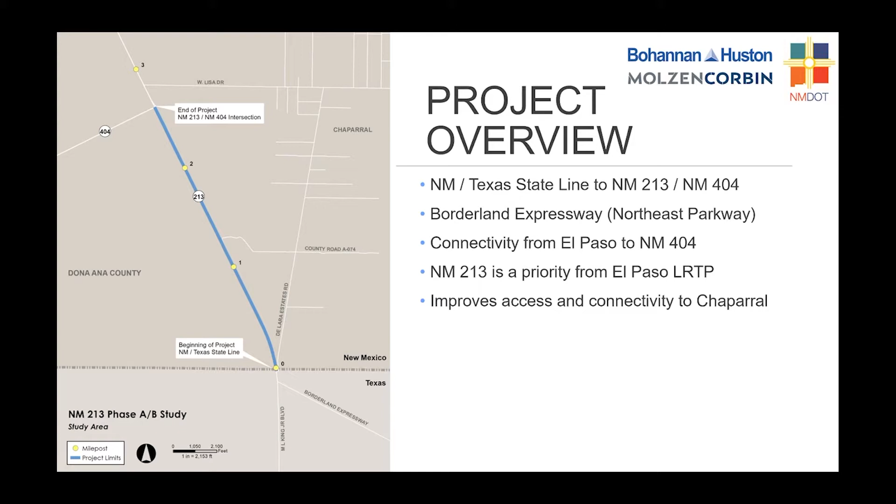And now to talk about the existing conditions analysis is your project manager for the New Mexico 213 project, Roy Gibson.

As part of the study process for the project, we have reviewed existing conditions of the current roadway. The existing conditions consist of a 2-lane rural highway, with two 12-foot driving lanes, and paved shoulders that vary in width from 6 foot to 8 foot.

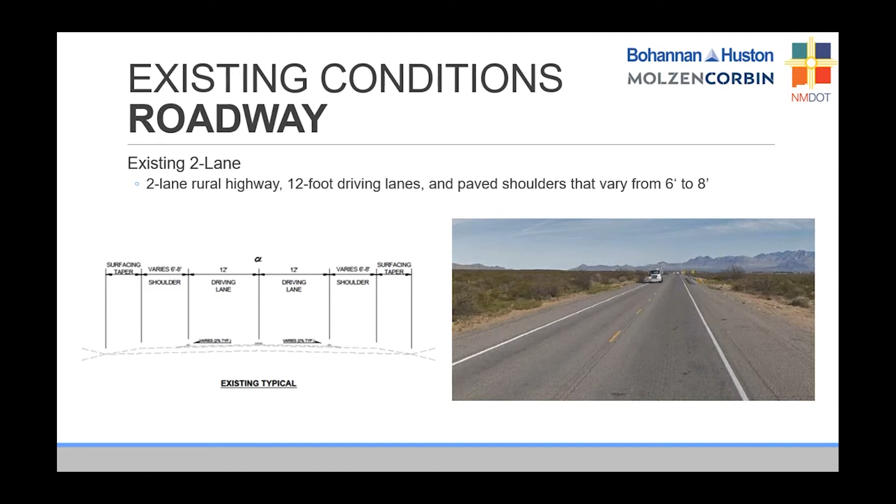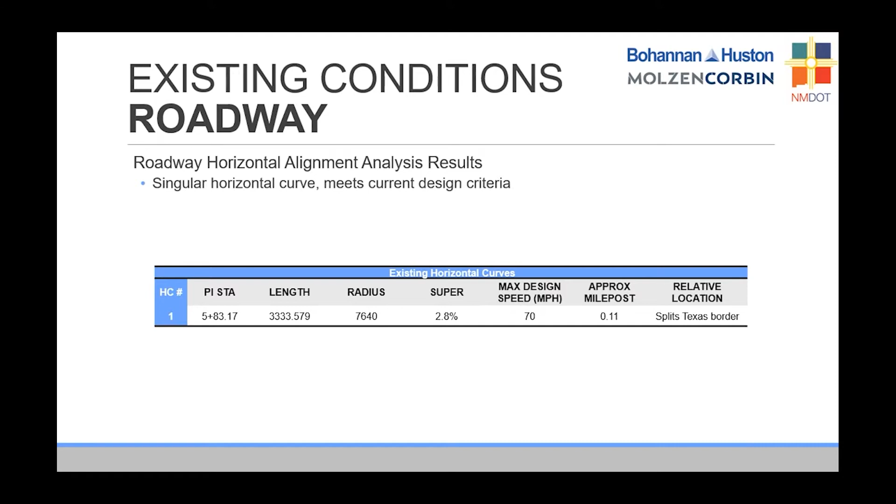The roadway contains one singular horizontal curve at approximate milepost 0.11, right at the New Mexico-Texas border. This curve meets the current design criteria.

Within the study area, 11 vertical curves exist. Two of them, vertical curve number 6 at approximate milepost 0.94 and vertical curve number 9 at milepost 1.57, fail passing sight distance at posted speed. All vertical curves meet the current design criteria for stopping sight distance.

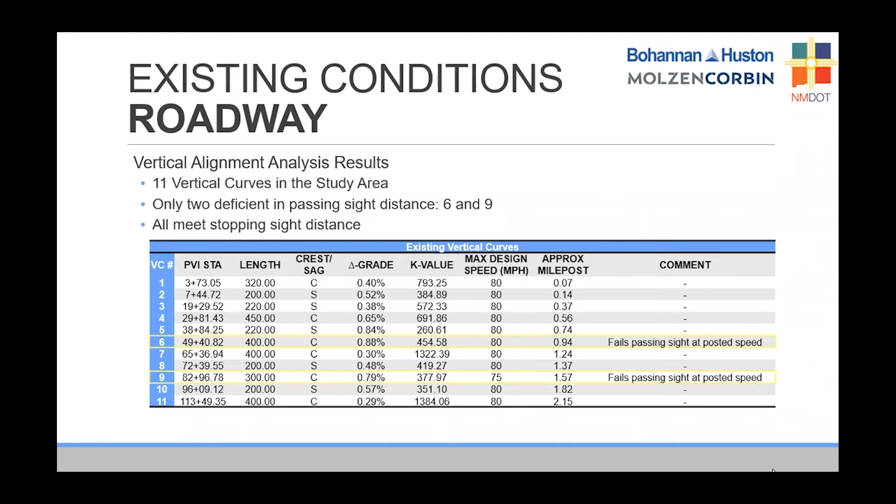This highway is classified as a rural primary arterial road. Based on the criteria in the State Access Management Manual, a road with this classification should have a half-mile spacing between full access intersections and no less than 775 feet between driveways, which equates to about 6 or 7 driveways or access points per mile.

As you can see from this map, there is a total of 16 access points located in the first 1.25 miles north of the Texas state line. This does not meet the state's current criteria for access management, and this close spacing of driveways could lead to operational problems and possibly safety issues. This is something that will be investigated closely by our team as we consider improvements for this corridor.

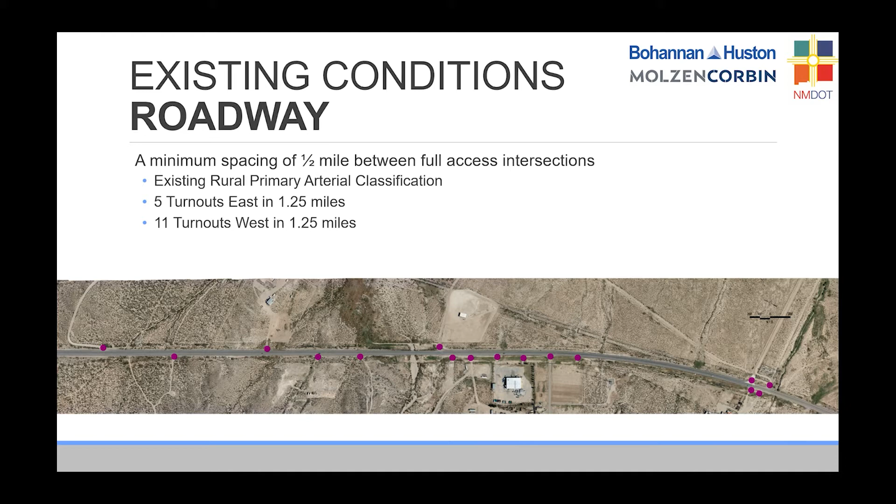As part of our existing conditions analysis, we also took a look at the traffic operations, or the capacity analysis associated with the existing two-lane highway.

Today, this roadway carries more than 7,900 vehicles in a single day. During the peak periods of any single day, that could be as much as 869 vehicles. That volume represents a level of service B, which means that the existing two-lane roadway has adequate capacity.

We also took a look at the 20-year traffic projections. We did this by applying historical growth rates, meaning how much the traffic grew over the last 5 to 10 years, and applying those growth rates moving forward. With those growth rates applied to 7,900 vehicles, this corridor could carry as much as 9,300 vehicles in a single day by the year 2040.

That's almost 1,000 vehicles in the peak hour. Even with 1,000 vehicles in the peak hour period, this roadway will still operate at an acceptable level of service C. However, as I mentioned previously, the one thing not yet taken into consideration is the Borderland Expressway improvements and the amount of traffic that may be generated from that corridor that will then reach New Mexico 213.

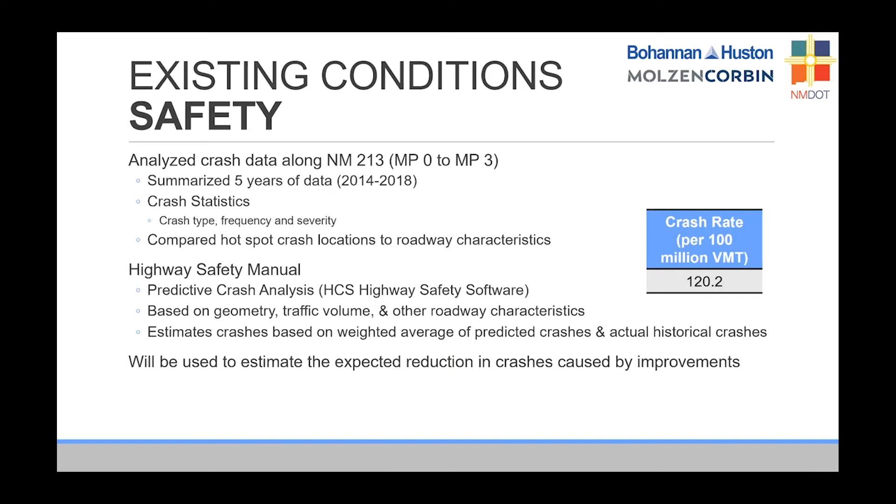The severity on this road, even though there's not a lot of fatalities or injuries, is still higher than the statewide average or the county average for this type of facility.

The highest was angle crashes, meaning 2 cars traveling in different directions hitting each other. The next was fixed object, usually caused by someone either going off the road and hitting something on the side of the road, or losing control and hitting something outside of the roadway prism. The next highest is rear end collisions, and the one at the bottom, sideswipe collisions.

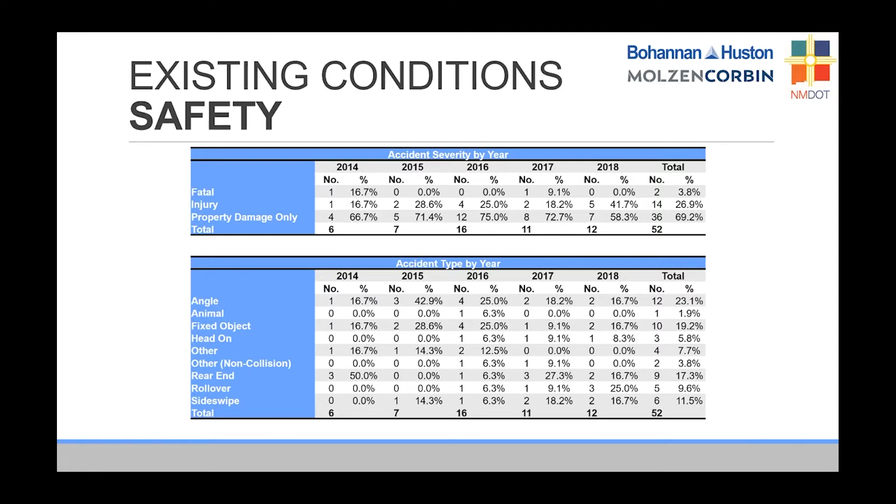It's interesting because a lot of those crashes in our crash history occurred prior to that intersection becoming a roundabout. When this was a T intersection, the number of crashes was a lot higher. Once the roundabout was installed, the number of crashes reduced significantly.

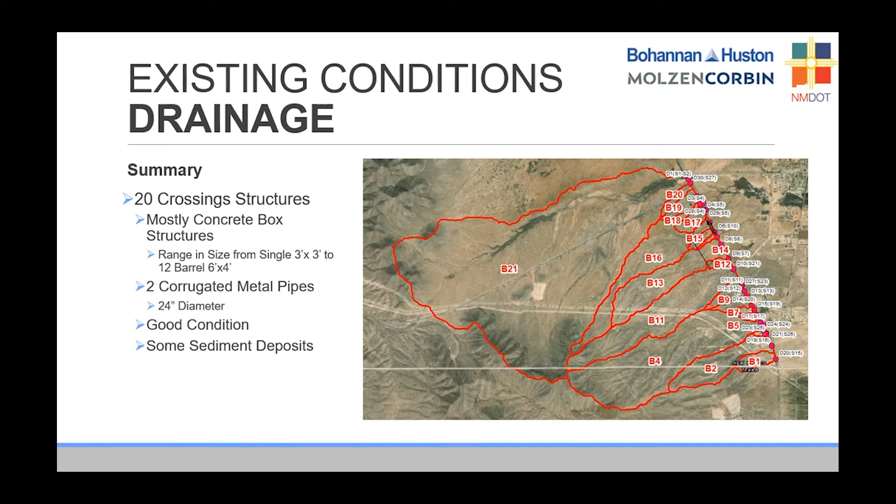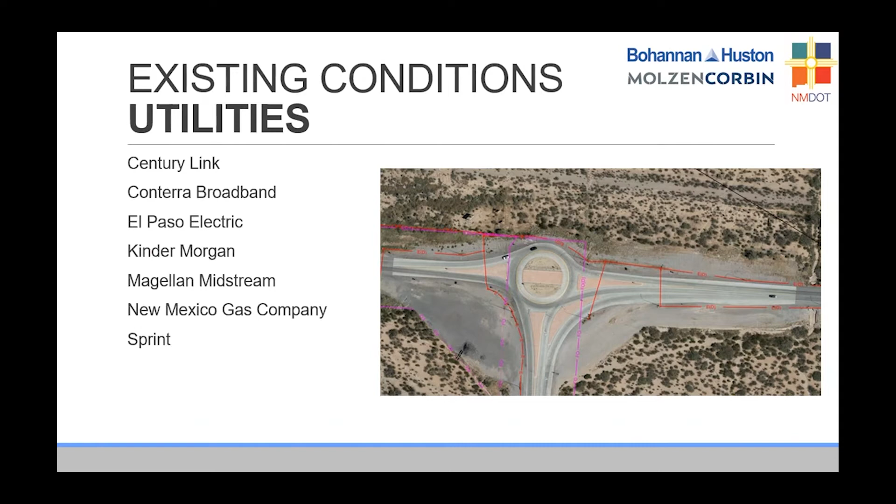As part of the existing conditions analysis, the design team will be coordinating with all utility companies to verify the locations of their existing utilities, but also to discuss plans for expansion or relocation. These companies include CenturyLink, Conterra Broadband, El Paso Electric, Kinder Morgan, Magellan Midstream, New Mexico Gas Company, and Sprint.

Our corridor study also takes into consideration environmental resources in accordance with the National Environmental Policy Act, or NEPA. This project is expected to have a categorical exclusion, which is the environmental document that will be reviewed by the New Mexico Department of Transportation, BLM, as well as FHWA. It looks at biological resources, cultural resources, and also takes into consideration air quality and hazardous materials.

On the biological side, there will be a ground survey done for threatened and endangered species. Our initial research has not shown any concerns in terms of biological resources that could be potentially impacted by this corridor.

On the cultural side, there are 3 known cultural resources within the project limits, including the historic War Road Bridge, and some archaeological sites associated with those 3 known cultural resource sites. We will do a complete survey of the current conditions and evaluate which of those resources need further investigation as part of the environmental documentation for the project.

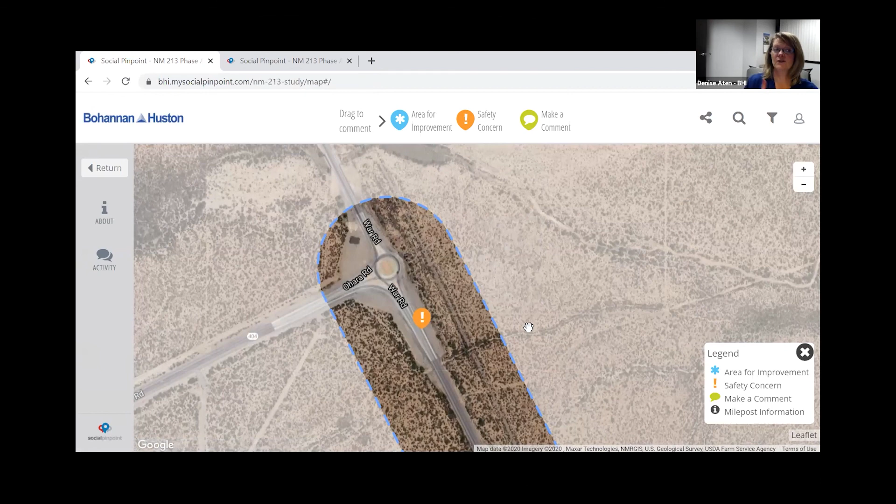And if the note is already there, it can be as easy as going over there and saying, oh, I agree with that comment, and that's an additional way to give your comments along the corridor. But if you disagree, you can also put dislike on that.

And the little black circles with the i in it just are identifying the milepost along the corridor, just to provide a little reference point.